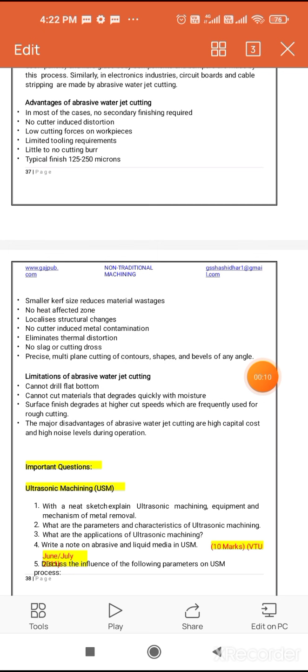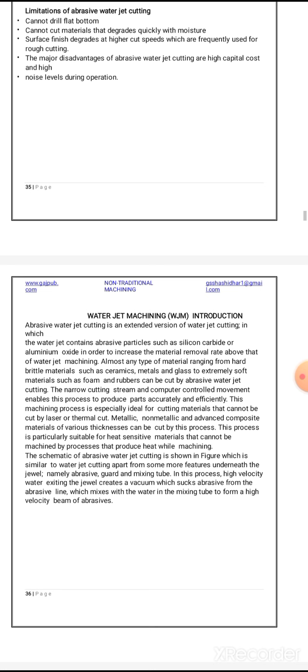Previous class, we went through abrasive jet machining and its working principle, applications, advantages and disadvantages of abrasive jet machining.

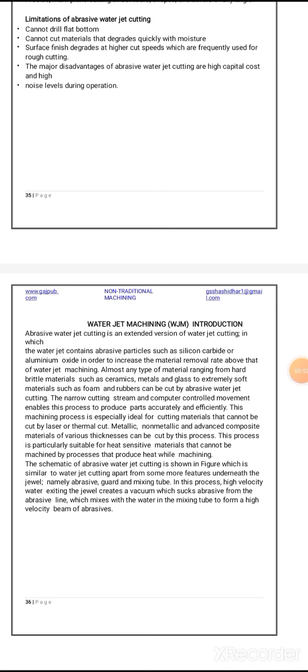Now, today's class is water jet machining. Just an introduction about water jet machining.

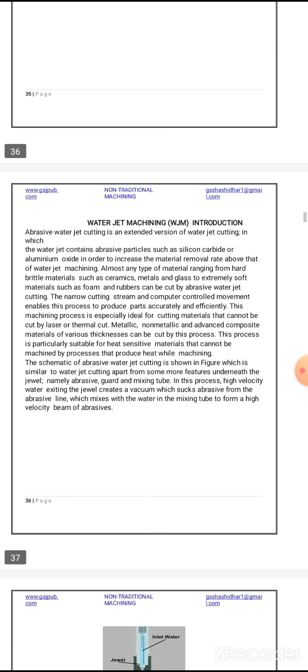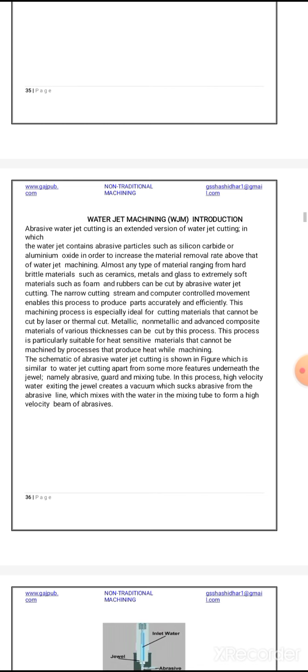Abrasive jet cutting is the extended version of water jet cutting, in which the water jet contains abrasive particles such as silicon carbide or aluminum oxide in order to increase the material removal rate above that of water jet machining.

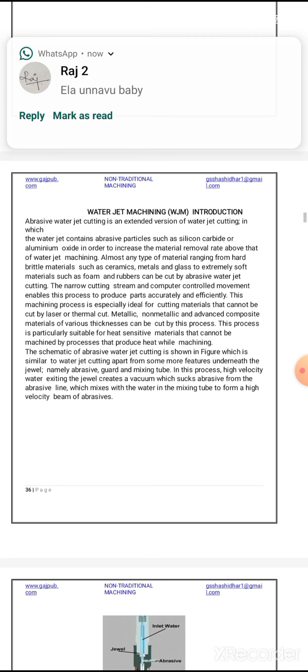In water jet machining, almost any type of material, ranging from hard brittle materials such as ceramics and glasses, to extremely soft materials such as rubbers, can be cut by abrasive water jet cutting.

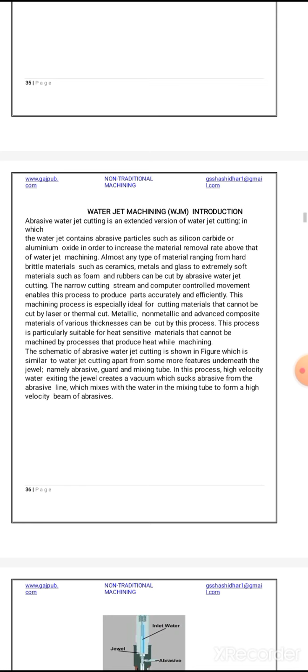The narrow cutting stream and computer controlled movement enable this process to produce parts accurately and efficiently. This machining process is especially ideal for cutting materials that cannot be cut by laser or thermal cutting methods.

Non-metallic and advanced composite materials of various thickness can be cut by this process. This process is particularly suitable for heat sensitive materials that cannot be machined by processes that generate heat while machining.

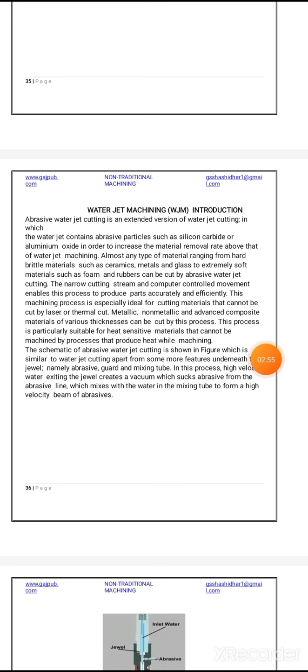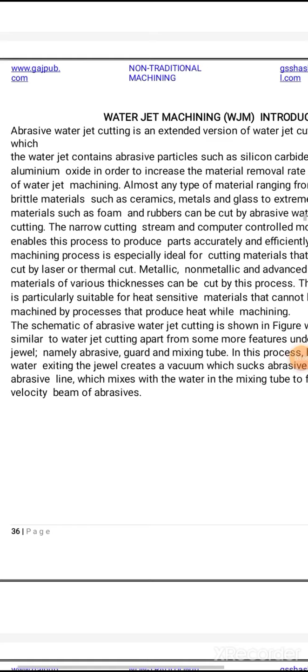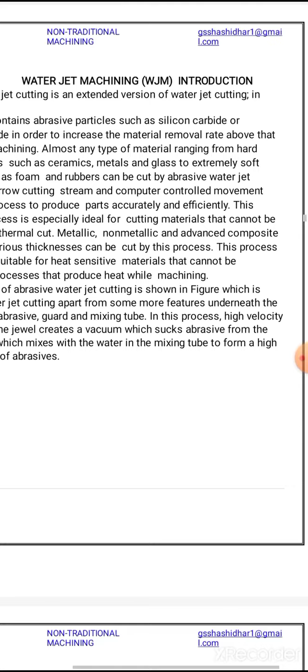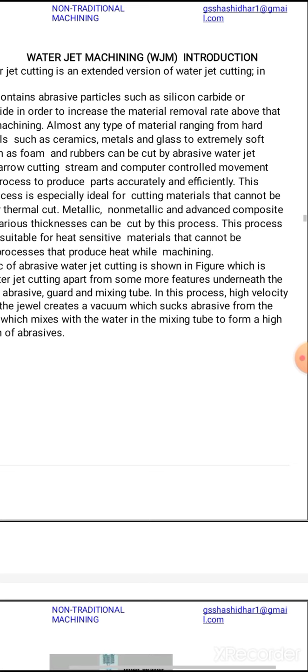A schematic of abrasive water jet cutting, as shown in the figure, is similar to water jet machining, with some more features added to the machine, namely abrasive and mixing tube. In this process, high velocity water exiting creates a vacuum which sucks the abrasive from the abrasive line, which mixes with the water in the mixing tube to form a high velocity beam of abrasive.

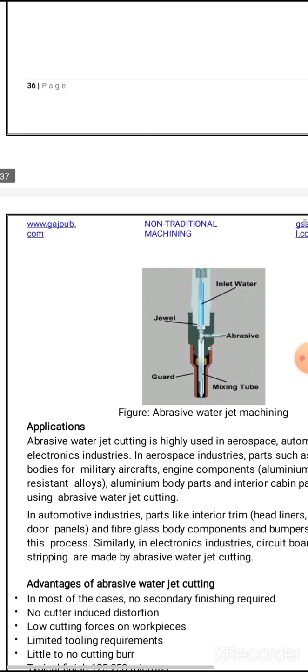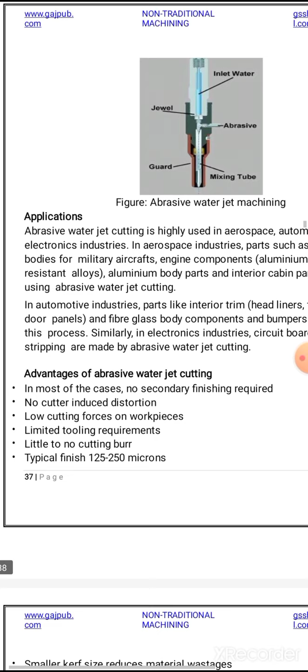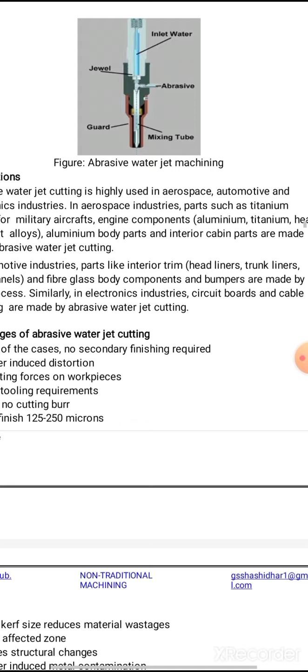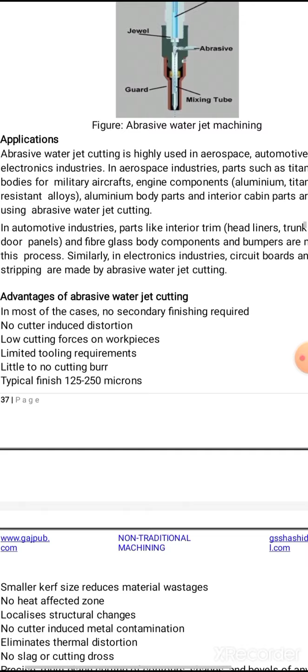Applications of water jet cutting: it is highly used in aerospace, automotive and electronic industries. In aerospace industries, parts such as bodies for military aircrafts, engine components, aluminum body parts, and interior cabin parts are made using abrasive water jet machining.

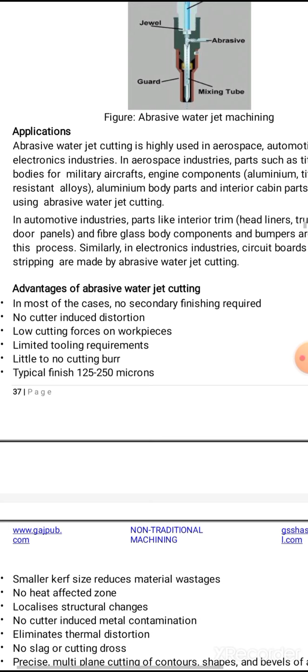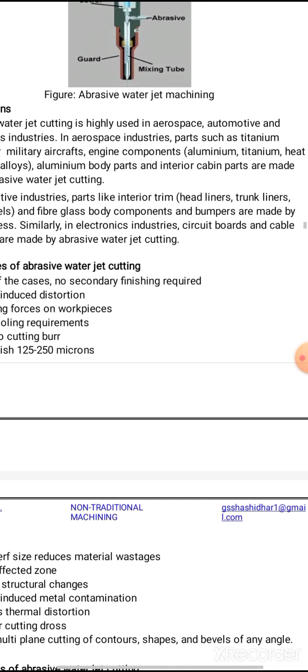In automotive industries, parts like interior trim and fiberglass body components, bumpers, are made by this process. Similarly, in electronic industries, circuit boards and cable stripping are made by abrasive water jet machining.

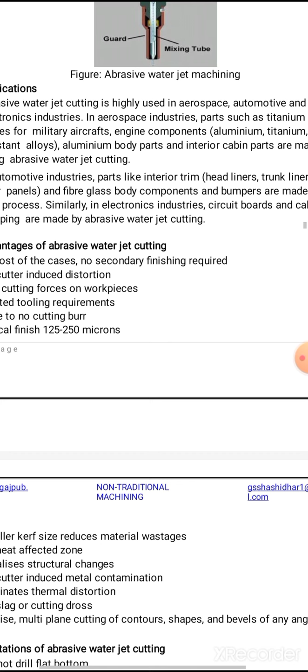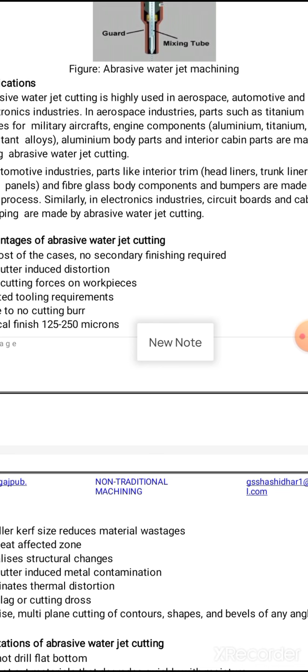A live example of water jet machining is service centers, that is four-wheeler and two-wheeler service centers. In daily life you can see this example of water jet machining. It is very noisy. Through the force of the water jets, 50% of the parts will be cleaned very neatly, and the remaining part is cleaned by some brushes.

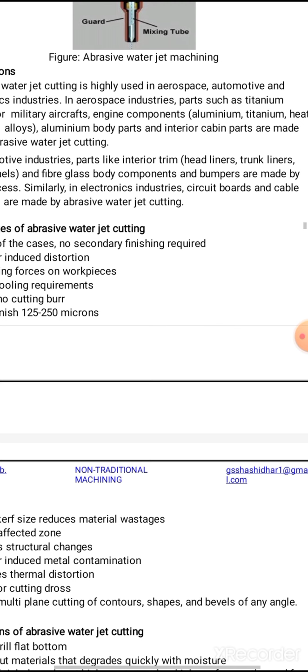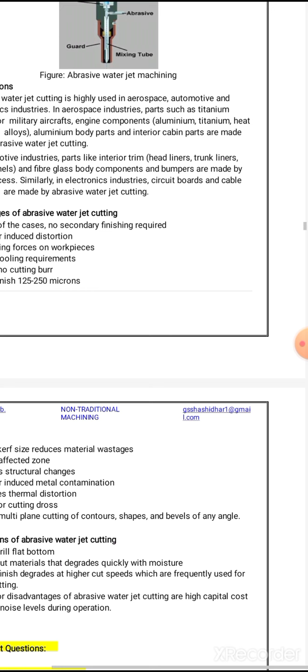Water jet machining uses jets of water directed to a target in such a way that on striking the surface, a high velocity flow is virtually stopped, and most of the kinetic energy of water is converted into pressure energy. Note that point: most of the kinetic energy of water is converted into pressure energy.

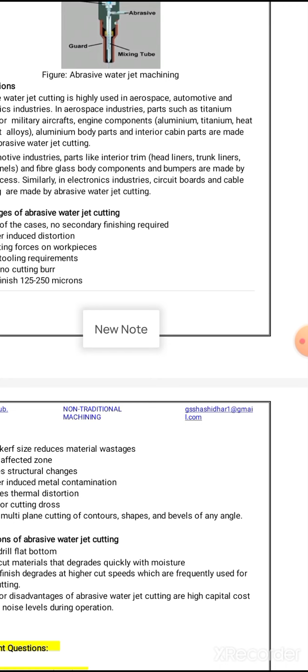In fact, in the first few milliseconds after the initial impact of the jet on the target, before the lateral flow of water is initiated, it transmits pressure as much as 3 times the normal pressure that may be generated. Local fluid pressure exceeds the strength of the bond holding together the material making up the target.

In other words, liquid jet cutting removes the material primarily by using mechanical action of a high velocity stream. The potential is in reducing the dust and associated hazards while cutting coal or rock. A number of studies using liquid jets have been made on these materials.

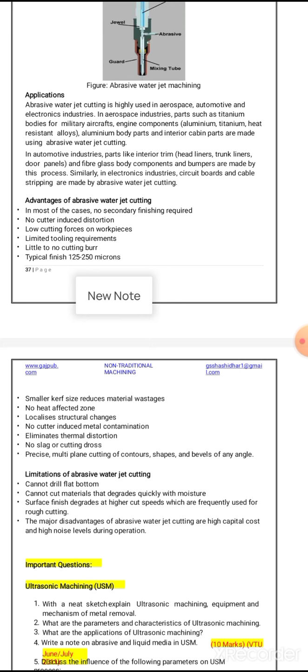The water and the polymer are mixed properly and sent to the intensifier, where the pressure is raised. The hydraulic intensifier increases the intensity of the pressure of water and supplies it to the hydraulic accumulator or receiver.

After sending to the receiver, the energy is not required continuously. During the idle period, energy is stored in the accumulator, given out during the cutting process.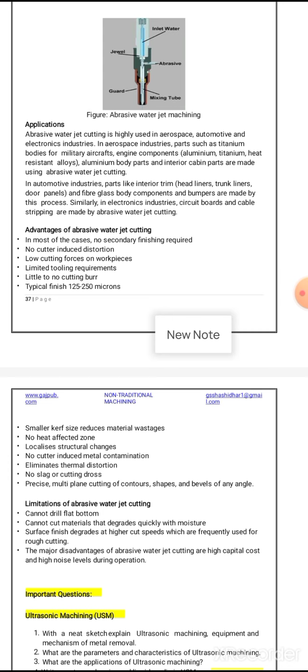Smaller kerf size reduces material wastage, no heat affected zone, and no cutter induced material contamination, eliminating thermal distortion and slag or cutting dross. Precision multi-plane cutting of contours, shapes, and it can be cut very easily.

Limitations of abrasive water jet cutting: cannot drill a flat bottom. Note that point, it cannot drill a flat bottom. Cannot cut materials that degrade quickly with moisture. Surface finish is rough at higher cut speeds, which are frequently used for rough cutting.

The major disadvantage of water jet machining is high capital cost and high noise levels during operation. It is a very noisy operation.

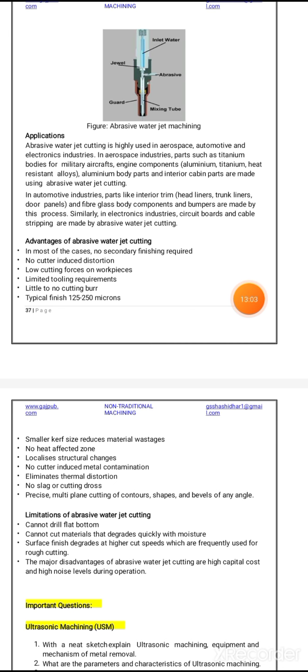Next, practical applications of water jet machining. Hydraulic mining of coal has been carried out in Russia, China, Canada, Germany, while experiments have been conducted in other countries including Britain. In most mining applications, water pressures below 3.5 kilonewtons per centimeter square combined with larger diameter nozzles have been used. A larger amount of water is used to carry the broken coal away from the face.

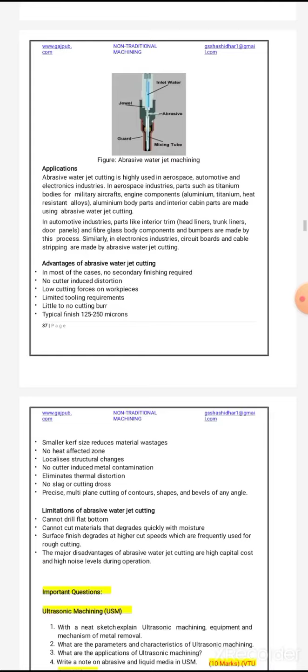The current development is combining water jets with mechanical methods for cutting both coal and rocks. High pressure jets cut slots which weaken the material, making it easier for conventional cutters to break through the coal or rocks.

Another area where the destructive power of water jets can be applied is cleaning, with handheld operating pressures of 3 to 10 kilonewtons per centimeter used in oil refineries, chemical plants, power stations, steel works, and dry docks. These are the advantages and applications of water jet machining.

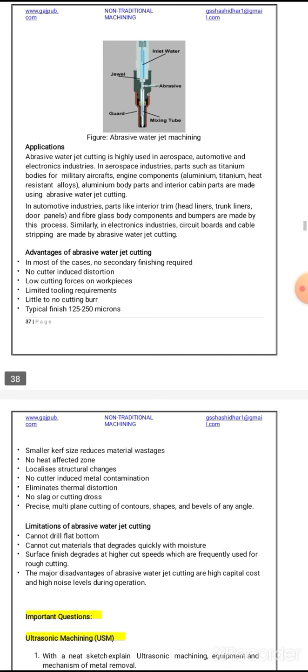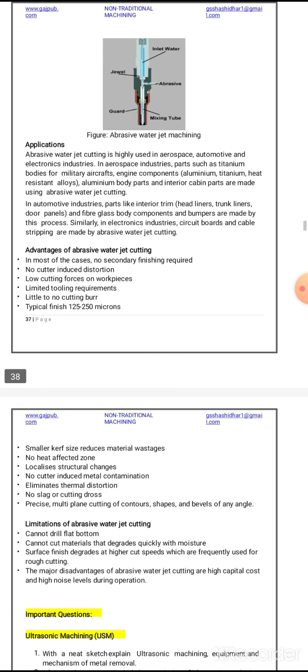Here are the important equipments in water jet machining: pump, pressurized liquid, tubings, fittings, valves, and nozzle with exit diameter.

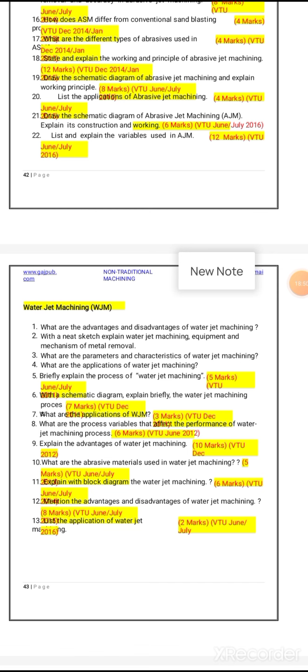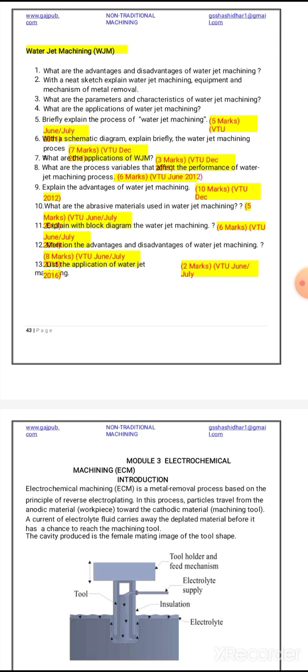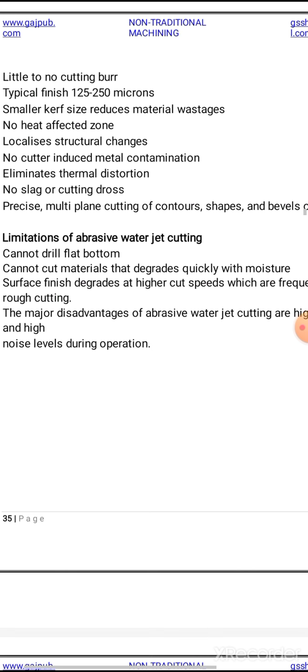Jet velocity: the kinetic energy of the abrasive jet is utilized to remove metal by erosion. It has been shown that for erosion to occur, the jet must impinge on the work surface with a certain minimum velocity, as seen in erosion of glass by silicon carbide. The minimum jet velocity has been found to be around 150 meters per second.

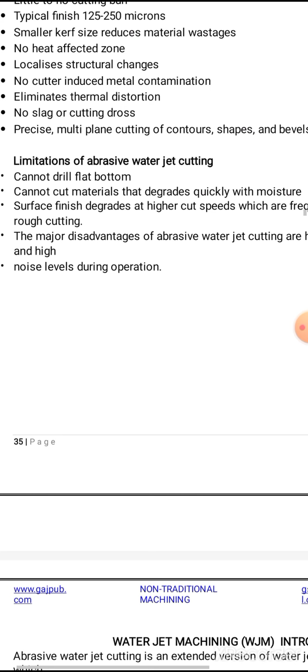Work material: abrasive jet machining is recommended for processing brittle materials such as glass, ceramics, etc. Though most ductile materials are not particularly machinable by abrasive jet machining, the rate of metal removal found depends upon the hardness of the material being machined.

Stand-off distance (SOD) is very important in abrasive jet machining. The SOD is the distance between the face of the nozzle and the working surface of the work. SOD has been found to have a considerable effect on the rate of metal removal as well as accuracy. A large SOD results in the jet spreading, leading to poor accuracy.

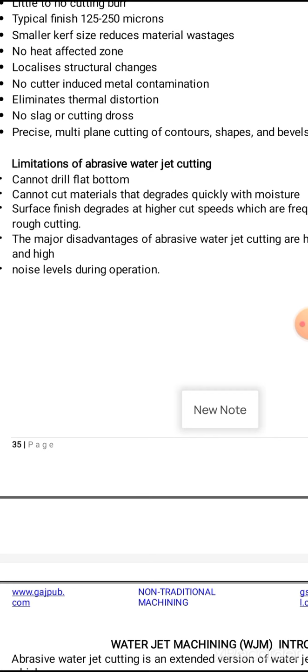Next, shape of cut: the accuracy of machining also depends on the shape of the cut. It may not be possible to machine components with sharp corners because of the nature of the cutting process.

In today's class we have covered abrasive jet machining: its working principle, variables, applications, and advantages and disadvantages of abrasive jet machining. Hope you understand, read thoroughly and understand the concepts properly.